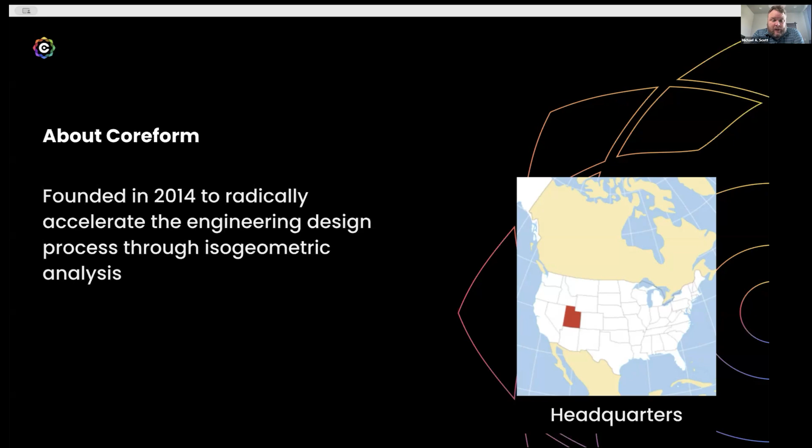So Coreform Flex is a product that we're just introducing to the market. That's one of the purposes of the webinar, to get the word out that this is now available for testing and for purchase. And it's the first solver built natively on top of this new isogeometric analysis technology. And it enables a fully automatable mesh-based workflow. And I'll show a couple of examples to illustrate the approach in a moment.

We use a generalization of the isogeometric methodology to be able to operate on the simulation models that we produce. We call that method the flex representation method. It likewise is a type of finite element method. So this isn't some novel or niche approach. We're using a standard finite element approach; if you have a deeper understanding of finite elements, it still uses the standard Galerkin approach.

And another really great thing about it is because the technology is a generalization of finite elements, it can support any capability that's also available in a more traditional finite element workflow. So it doesn't require that you discard the years of work that had been put into the development of workflows around traditional simulation packages.

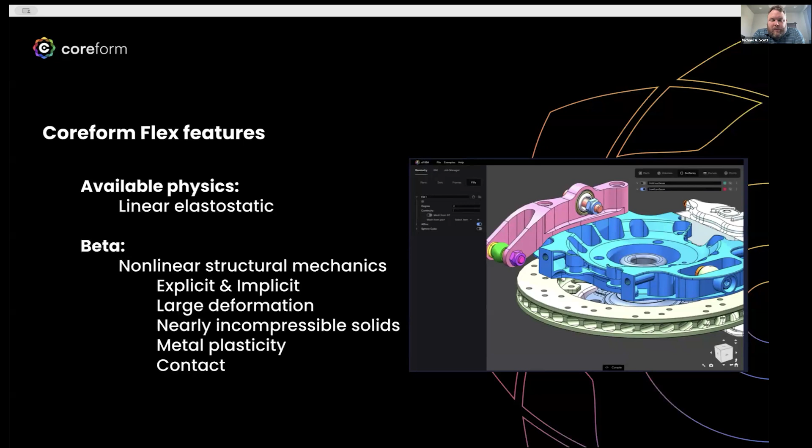Okay, so let's go ahead and talk a little bit about the traditional finite element approach to model setup, which is one of the most time-consuming parts of the process. And it's unfortunate because it really doesn't add value in the sense that it does not really provide any engineering insight, which is the point of running a simulation. It's really just an activity to try and massage CAD data into a format that's consumable by a finite element type algorithm.

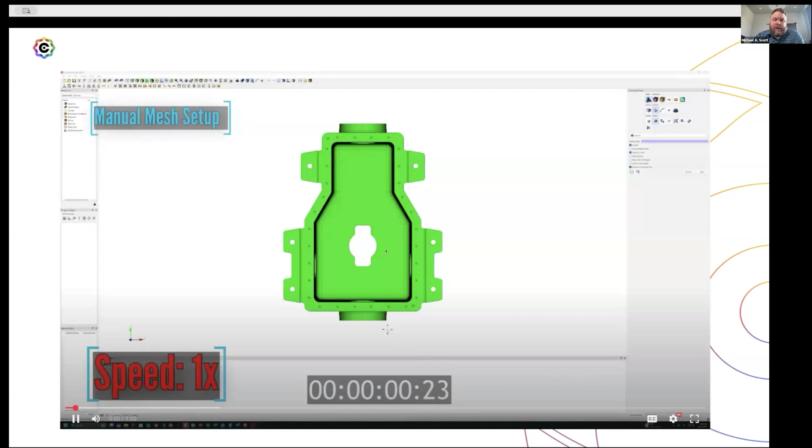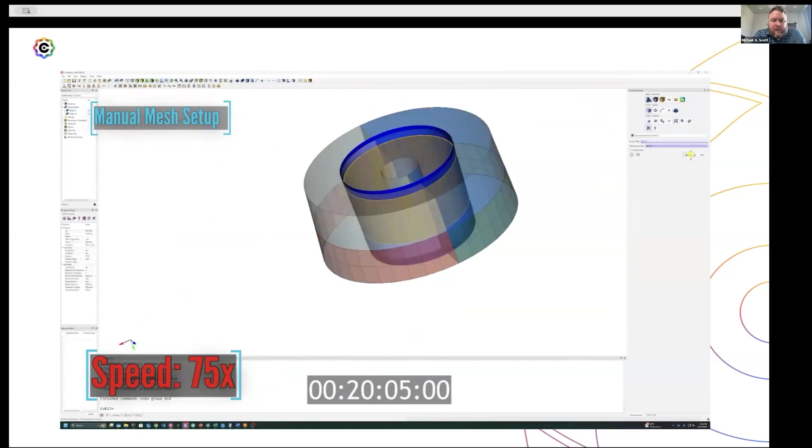And so here's an example where we use a traditional workflow to put a hex mesh onto this CAD geometry. And what we're demonstrating here is just the huge number of steps, including a number of defeaturing steps to allow us to then cut up the geometry into hex meshable subvolumes. Tet meshing, of course, is a little more automated, but it still often requires a defeaturing step and is not

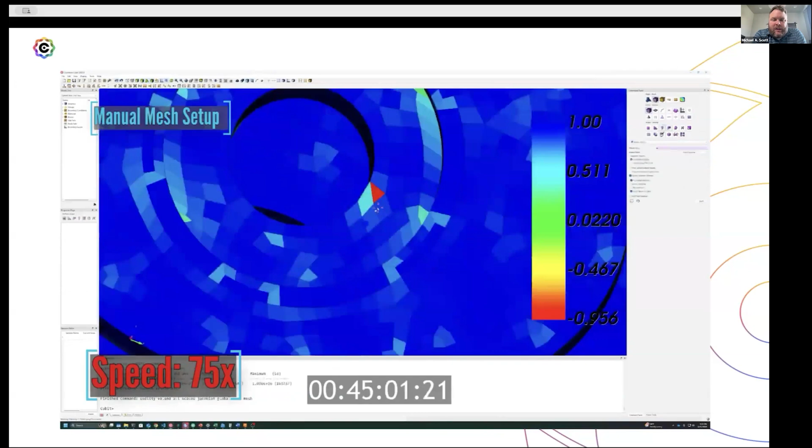completely robust. And what we're really after at Coreform is, given any CAD geometry, can we exactly generate a representation that's consumable by a solver that is an exact representation of the original CAD at any level of complexity that the user would desire.

So the intent there is just to give an overview to people that may not be as familiar with the pain that's felt when people are really trying to prep models for simulation. This isn't even about running the simulation. And then often the mesh that you produce may not be sufficient for the simulation, which then puts you in this position where you have to go back and remesh, change your approach. It just becomes very, very challenging. And it's just a waste of time and resources.

Okay, so let me show you now our approach, which is really powered by the core concepts of isogeometric analysis, which says that the CAD geometry is defined in terms of a set of basis functions that can be used in simulation. In fact, those functions are smooth and higher order, which is really powerful from a numerical analysis point of view. It is in some sense the most efficient and powerful set of functions that you could use for approximation in finite elements.

And what this allows us to do is rethink the process of bringing the CAD model directly into the solve without needing to do what I would call a traditional meshing step. And I'll show you here what we do instead. We do produce a mesh.

You know, every finite element method, regardless of how it's marketed or sold, has some type of a discretization or mesh in the background. And we likewise have a mesh, but the process of generating that re-representation of CAD, and I should say that CAD also has a mesh because it's also represented in terms of functions and geometric nodes and so on. The process of us doing that can be fully automated. Let me give you an example so visually you can see what I'm referring to here.

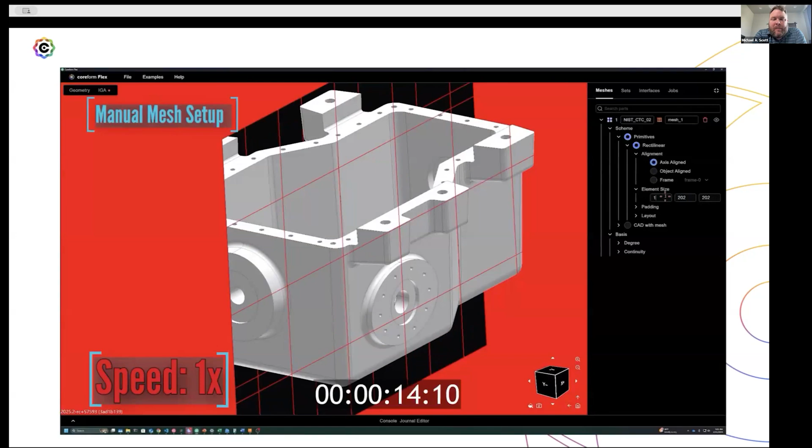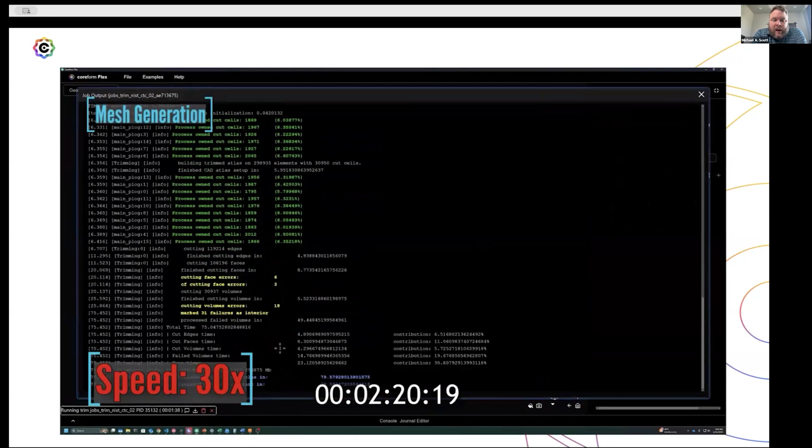So here's the same CAD model that we showed previously, but now we're going to bring it into Coreform Flex and prepare it for simulation. And you'll notice the difference right off the bat here. Okay, so we bring the model in, and the meshing process really is what you would call an immersed technique, which puts a higher order smooth spline background grid. It overlays it over the geometry and then runs an automated trimming procedure to generate a volumetric CAD object that is an exact representation of the original CAD object.

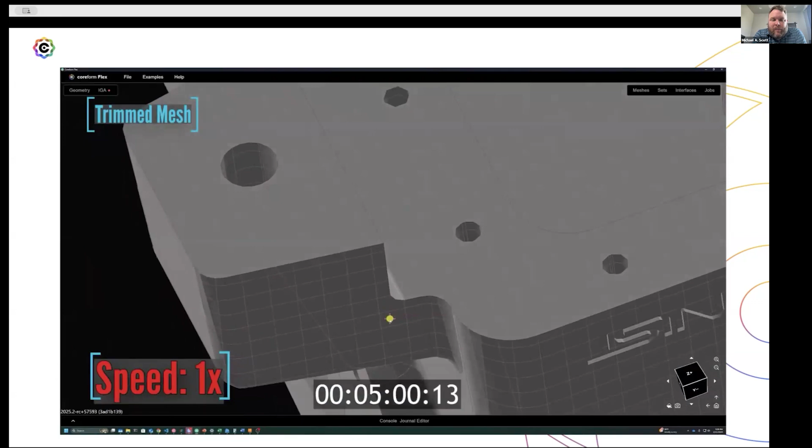And so that's the entire model prep process. We just ran it through trimming, and now we have a representation of the interior of the object as well. And the functions that will be used for simulation are the smooth higher order functions that are defined on the rectilinear background grid. So they have beautiful approximation properties that you can leverage.

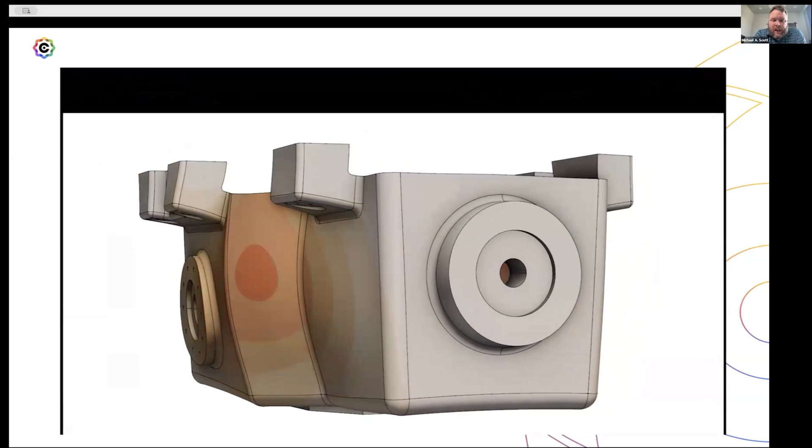And then you can run the simulation directly on the fully featured CAD. If you desire to remove features, that's fine. I mean, any CAD object that you feed into the trimming procedure will be accommodated automatically. And so here's just a very simple simulation to show that it's computable.

Here's a more complex part, just to demonstrate that we can do things that are, if you think about meshing something like this, this can be extremely challenging. I mean, if you want a hex mesh, it's essentially impossible. Even if you want to mid-surface it for shells, it's very, very challenging.

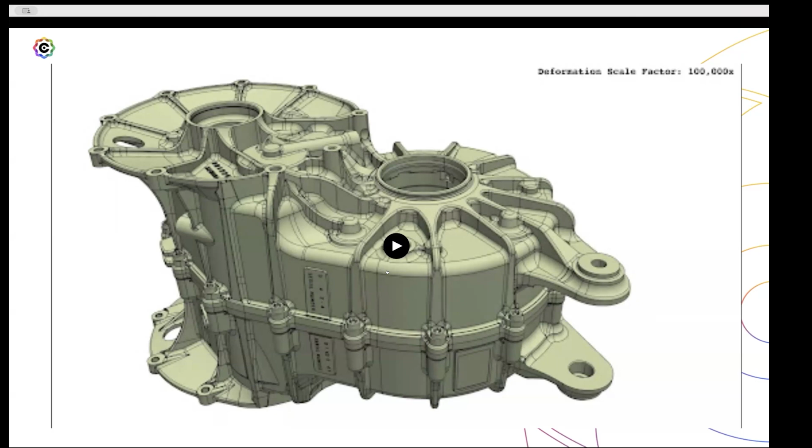And I think Greg Vernon can correct me if I'm wrong, but we weren't even able to tet mesh this object because the geometry was quote unquote dirty. So that's correct. So in fact, this model could not be meshed by any known meshing process that we have available to us. And let me show you the process with our approach.

Well, what you'll notice is there was no process, right? So we just trimmed the model, and what you're seeing on the screen is the result of trimming. It's an exact representation of the geometry, but it's a volumetric model. So it's not just a collection of bounding surfaces like the original solid CAD model. It's actually a high fidelity simulation model that you can simulate on directly.

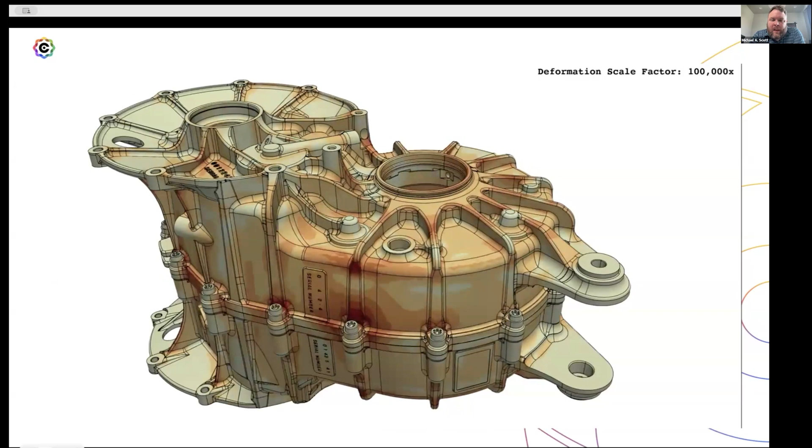And so then we just applied a load on the interior, a pressurization, just to demonstrate that the model is computable, of high quality. Likewise, this particular model is an assembly of parts. So there's the top and bottom pieces, and the screws are actually modeled with tied contact, mechanical contact. There's contact between this upper part and the lower part. So it's actually an assembly of parts that are being held together as it would be held together in its physical instantiation.

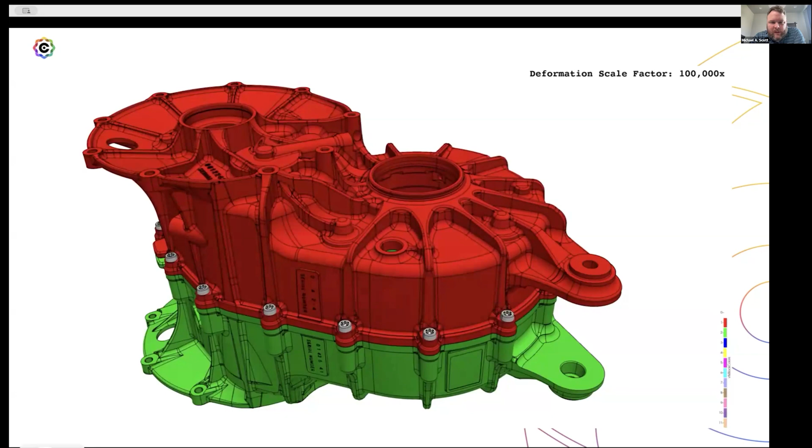All right. And just to emphasize that point, here is the same problem, but now we've highlighted the different parts of this assembly. And I always get a kick out of how even the embossings, we capture the embossings. Of course, you could get rid of them if they weren't of any engineering relevance. But it's great to have a method that can preserve as much or as little of the CAD exactness as the user wants. You're not forced into a position where you're defeaturing just for the sake of, can I get a mesh on it so that I can actually run a simulation? Our users have full flexibility and can make those decisions based on the best practices and engineering judgment that they bring to the problem.

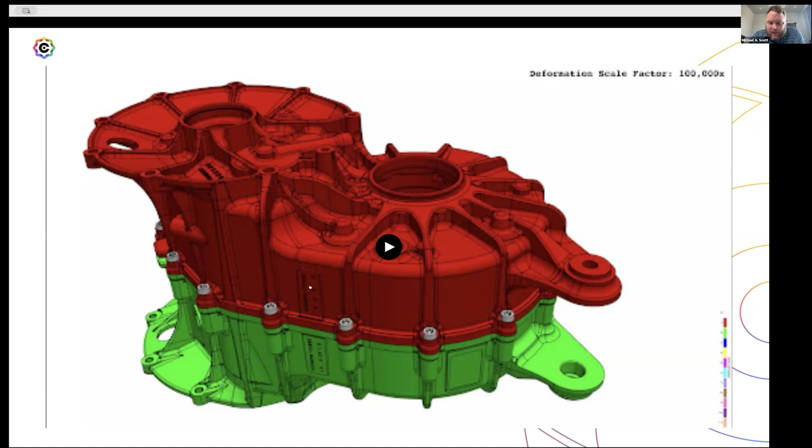Here's another example. Again, just some complexity. Here we're showing a contact problem. So this is a highly nonlinear dynamic. This is an explicit dynamic simulation with contact. And like I mentioned at the beginning, these are the features that will be released soon. And so you can see that contact is also quite robust because it operates on this nice smooth geometry, which is a big deal for contact.

If you have a background in contact, you'll know that the faceting is a challenge with contact. Especially sliding contact across faceted surfaces can produce a lot of numerical noise. And since we're operating on the exact geometry, we don't suffer from those challenges, which makes nonlinear convergence much more robust. Okay.

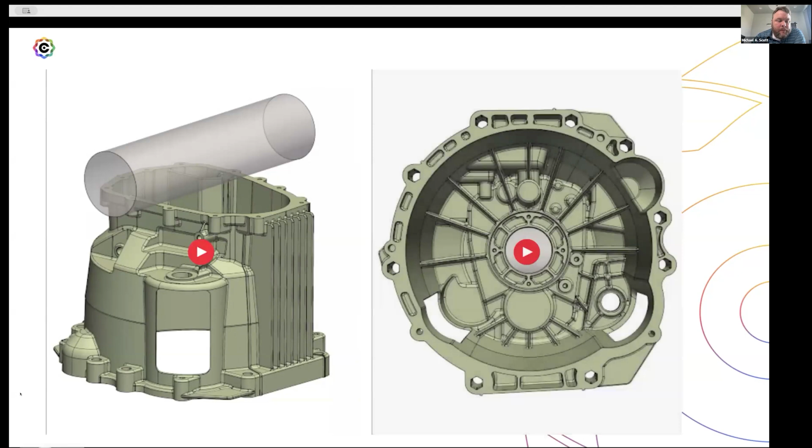So I'm going to bring to a conclusion my introductory comments about Coreform. Like I say, we will address questions after Greg does his demo. I imagine there's questions about the software and how it works. So hopefully we can answer some of those in the next section that Greg is gonna lead.

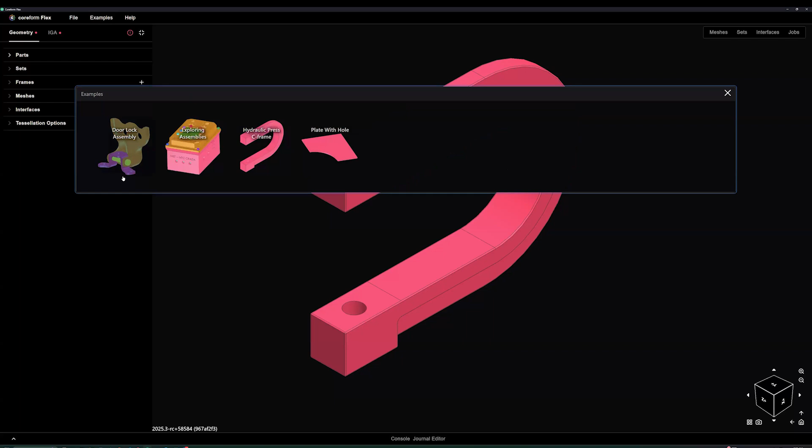And this is maybe one that some of you have seen before, but we'll show an additional example as well. What I want to point out is that for any of our early adopters who are using Coreform Flex, we have a few pre-baked examples that come with Coreform Flex, including the standard plate with a hole, as well as this C-frame example. The other example I'll share today is this door lock assembly example. And I just want to get you familiar with the overall workflow of using our tool.

You can see we have these two model trees, a geometry model tree, and then our IGA, which stands for isogeometric analysis, our IGA model tree where you specify solver settings. Note that the mesh then is defined on the CAD.

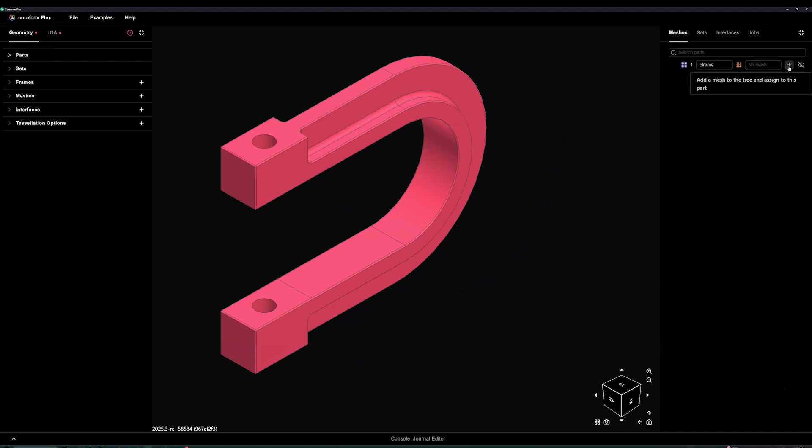And really the process to create the mesh is pretty straightforward. At the top right, we have what we call our mesh manager, which is a little kind of wizard dialog where the process of generating the mesh is as simple as choosing the part I wish to mesh and clicking the little plus button to add a mesh, which picks an automatic size based on some heuristics. Oftentimes that mesh size is a little coarser than we might wish to have.

And so we can navigate into this mesh. I want to point out that we currently have what we call primitive meshes, which include this rectilinear background grid. We're developing additional primitive schemes like a sphere mesh for parts that are mostly spherical, or annulus meshes for parts that are kind of like a torus. But you can even bring in a traditional body fit CAD mesh as well, which really highlights the fact that what we're building is truly a generalization of finite elements.

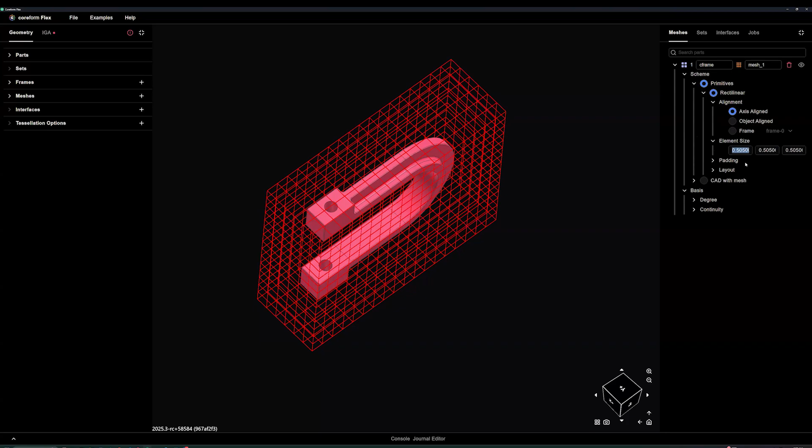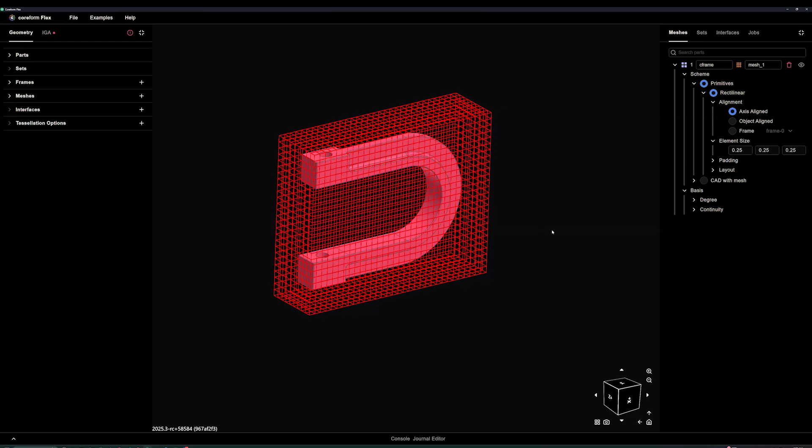And within this rectilinear primitive mesh, we can simply choose a size that we think works better for our case here. So I'm choosing a mesh size of 0.25, for instance. And maybe that's a mesh now that is fine enough for my purposes. And that's it. Meshing from a user standpoint is done. The trimming process will occur automatically when we launch a simulation. I can choose to generate the mesh independent of the simulation if I wish to preview it, but that's all I have to worry about.

As far as the rest of the simulation setup goes, the actual physics solve we call a procedure. And so we recommend that users begin by adding a procedure to their model. And you can see here we have a few different physics that we currently support. The modal analysis and heat transfer are still in beta stages. Solid mechanics is what we're talking about today.

And then as a user might go through here, maybe I want to choose a time stepping method. We'll bring up a little dialog that assists you with navigating the model tree for adding the physics you wish to add. So you can see we have a few different time steppers, including an explicit dynamic time stepper, some implicit dynamic steppers, a nonlinear static solver, and even linear solvers as well. So if we wanted to do a linear analysis, that linear analysis needs a linear equation solver. And again, I can navigate this little breadcrumb interface to choose a direct LU decomposition based solver.

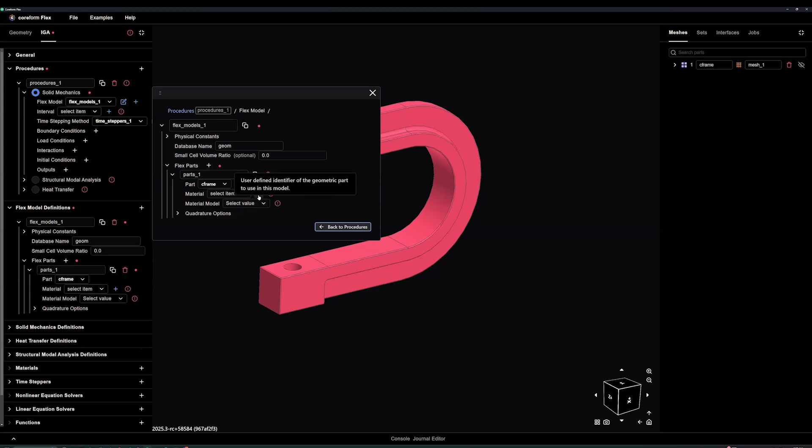And then as I finish each step, you'll notice that there have been these stop signs along the way, and the stop signs for this sub procedure have gone away. And I would essentially just navigate my way through this procedure tree, adding a time interval for my model, creating a flex model, where I would say I want this C-frame part to be active in my assembly. I want to add a material for my model, again navigating through the model tree here. I'll just put in some dummy values here just so we don't get some syntax errors.

As far as actually running the simulation, we then have a job manager as well, where we would add a job, and I would choose the amount of cores that I would want to run on, and then I would just simply submit my job. And that's really the process of the workflow now. Because meshing is gone from the workflow as a manual iterative process, it's really quick to just set up the simulation parameters and execute.

I want to also mention that all of these commands that I've been clicking through in the model tree have been issuing what we call flex commands. These are strings of commands that you could add to a journal file and automatically play. But furthermore, we support Python wrapping around any of those commands. So we ship what we call our Flex Python API.

Here in the command module, I'm just going to shebang over to a Python interface. For any of these commands, I can simply reference the Flex module and then use the CMD or command function. And I can say that I want to create a new job. So I'm just going to copy the syntax that I saw here to then create a new job. And so this allows you to even import Flex as a Python module into an external Python.

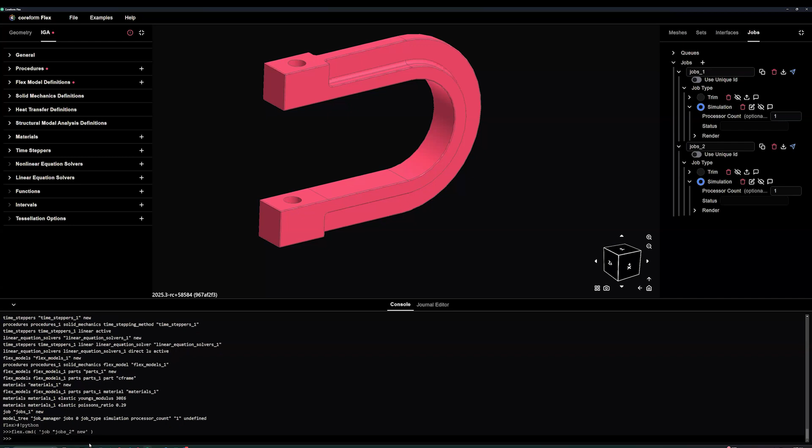So for those of you who care about scripting and automation, especially in this day and age of AI, you now have a completely robust meshing interface that can be fully automated via Python. And so Flex can operate right next to your PyTorch, for instance. This is a single part.

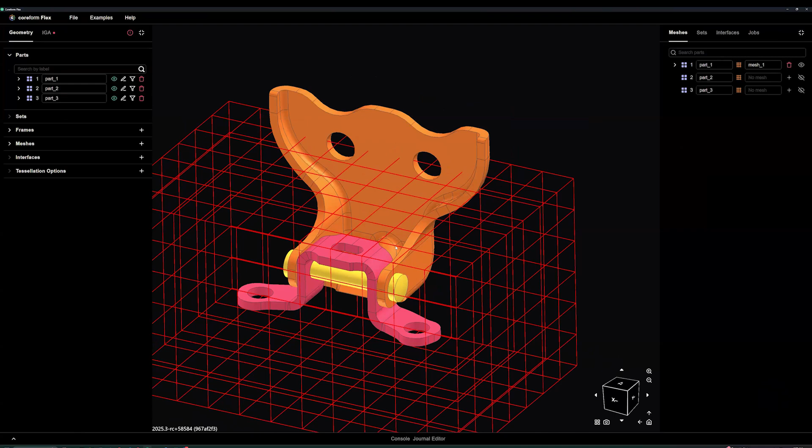And I just want to now show a more complex assembly. This other example that we provide, the door lock assembly, and we'll see that the workflow is essentially the exact same here, where the first process that I'm going to do, you can see I've got my 3 parts, is I'm just going to add meshes to each one individually. So I'll add a mesh to part 1. That is this door, or this link here. It kind of is wavy.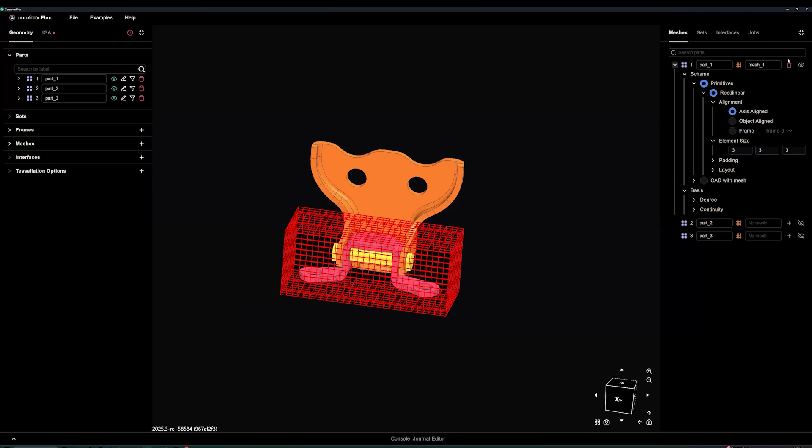And again, I'll choose a mesh size. Maybe I'll choose a mesh size of 3 by 3 by 3. Those could be non-uniform values if I wished. So I'm done meshing the link now, so I'll go ahead and hide that mesh. Now I'll add a mesh to the second part, which is this hinge on the back side. And again, I'll modify its element size to something that's more reasonable for my analysis. Okay, so now I'm done meshing that part.

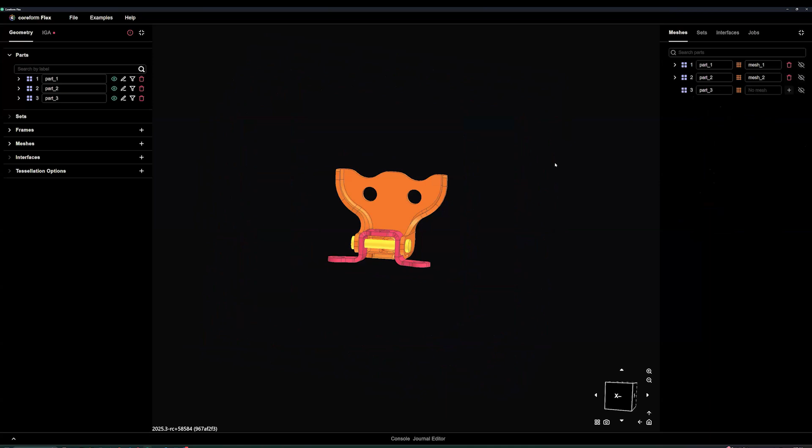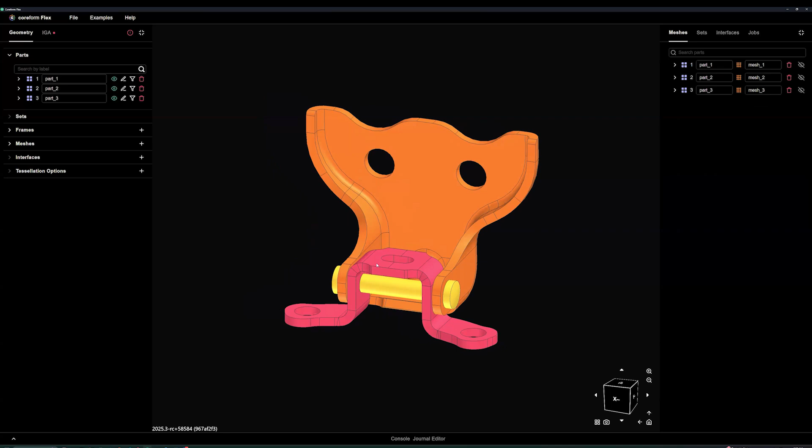And now I'll mesh the bolt. And again, choosing a mesh size, I'll just choose that same mesh size of 3 by 3 by 3. So there you have it. I am now done meshing this assembly. It didn't matter that there were 3 parts. It didn't matter that some of these parts are maybe thin structures or sheet metal, like bent sheet metal structures. The meshing process is the exact same.

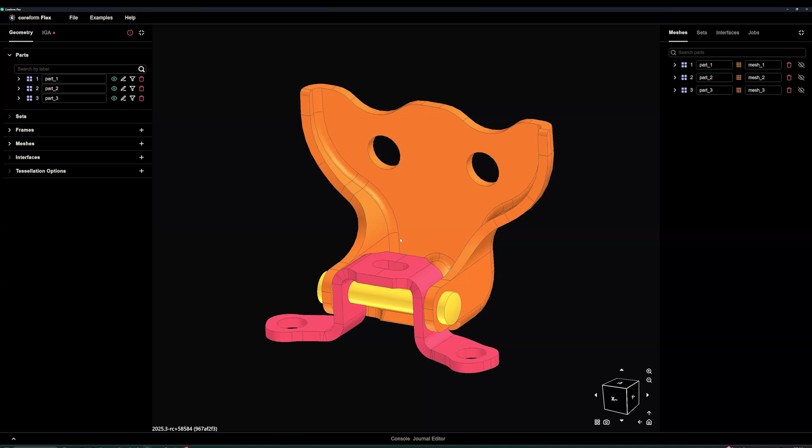Some of you may be aware that this is also an example that we have documented on our forums with a traditional meshing software called Cubit. And it's a quite involved process to build a hex mesh with traditional meshing processes. It's probably about 15 minutes for an expert user to build a mesh. For a novice user, it's maybe a couple hours to try to build a hex mesh on this assembly.

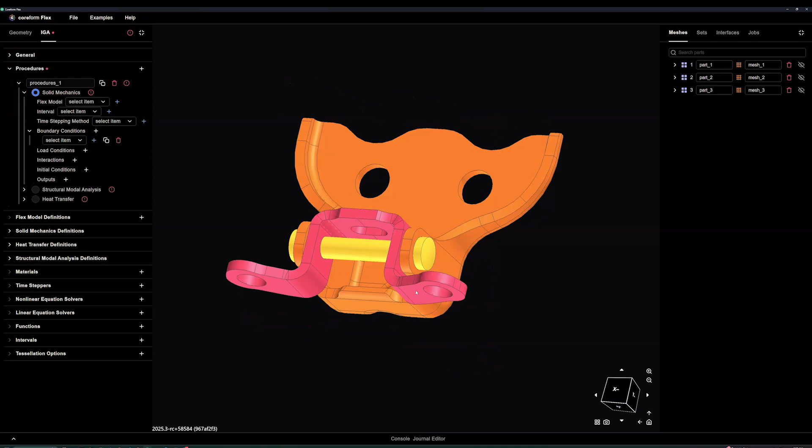And from here, I would just do the exact same process of creating a procedure, get another solid mechanics procedure. Maybe this time I'll just show assigning a couple boundary conditions. So in this case, I want to hold the bottom of this link fixed. So I'll just create a boundary condition. That's going to be a displacement boundary condition, and I'm going to completely constrain it in the X, Y, and Z directions. I want it to not move at all, so I'll choose that I want it to move by 0.

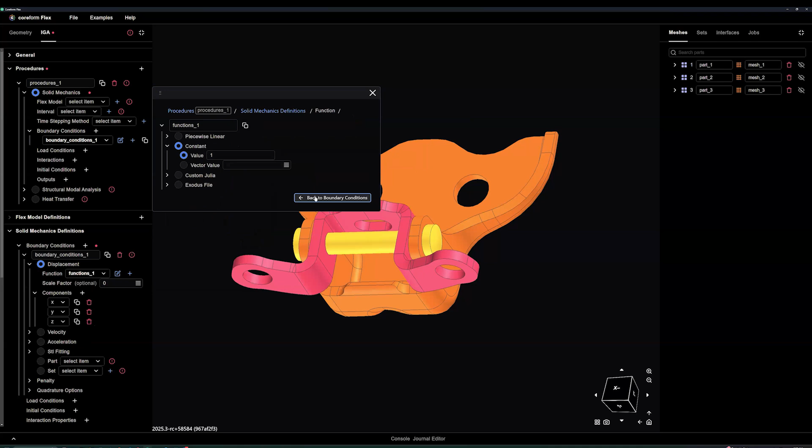I'll create a time-dependent function that is just a constant value that can be scaled by time. And so I chose 1 and then scaled it to 0. The one important thing now is I just need to create a set. So I'll just click a plus by the set that I want to apply this onto, and then use the set manager to quickly choose the surfaces that I want involved in that set. And I want to point out, I've chosen the sets after I've already built the mesh.

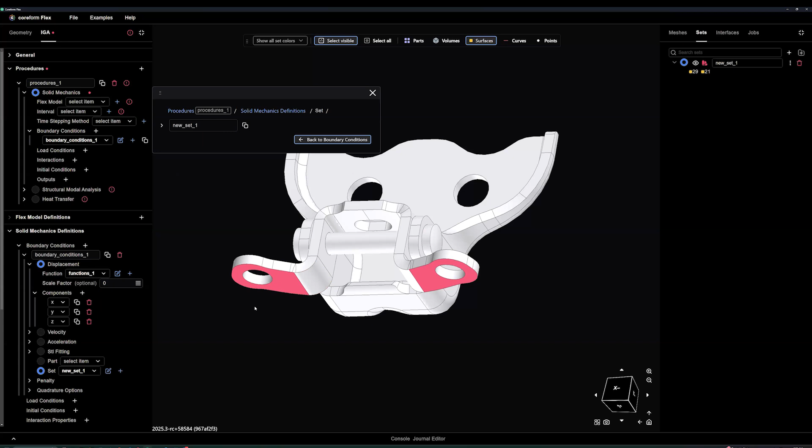And so if you're familiar with CAD-based meshing processes, if I wanted a different region for my set, maybe I needed to subdivide the surface even further to have a smaller region, you would oftentimes need to remesh and redevelop your meshing routine to build that new body fit hex mesh. But I have now completely separated the set assignment for load and boundary conditions from the meshing process. And so there's no iteration on your mesh just because you want a new set.

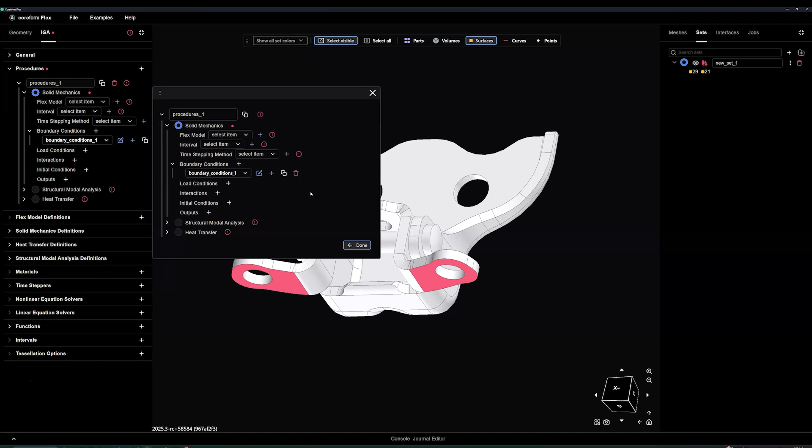And that's really it. We could go through all the rest of this process of choosing the material models to include plasticity, adding contact, a general contact algorithm, our time steppers. But that's really just a lot of parameter selection at this point, and there's no more meshing at least. And again, this is fully automated. If you look at the journal files that open up when we run this problem, you can see that it's been fully automated to make all those selections and then run this analysis.

So Greg, I think you said this, but just wanted to emphasize that boundaries and loads are applied directly to the CAD object. Yes. So we don't apply boundary conditions to node sets, for example, or element surfaces. It's all done directly on the CAD object that you've trimmed.

Then another question came in about the order of the elements. I think in this case there's C1 quadratic. Yes. And so we support currently up to quartic C3.

That's all that we've had a need to do so far. We could go higher order than that, but haven't seen a use case for it yet. Yep. Yep. That's a great point.

And as you can see here, also in the mesh manager, this is where you could specify that degree. By default, we build maximally smooth splines. So for quadratics, that would be a C1. But you could also choose a custom continuity if you wanted. So you could have P2C0 if you wished.

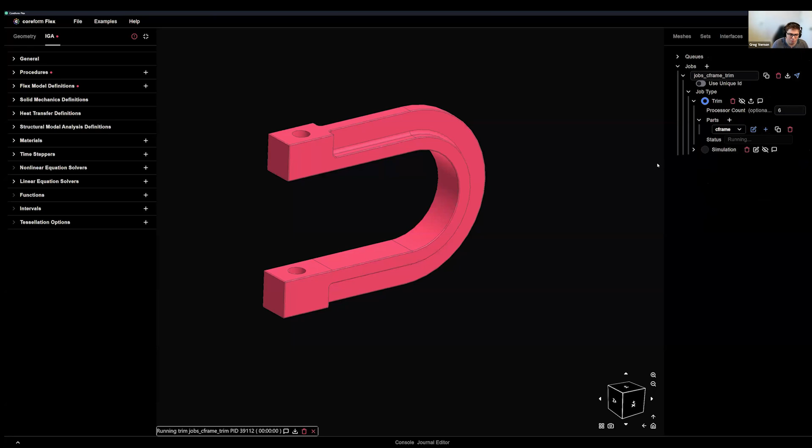Should also mention that the trimming process is a parallel process. So traditional hex meshing and tet meshing are traditionally serial or single core processes, but we've developed this algorithm to be parallelized. So I'm just going to launch this trim job. And I'm just looking at the output from this job here. So you can see it finished trimming that part in about 6.5 seconds.

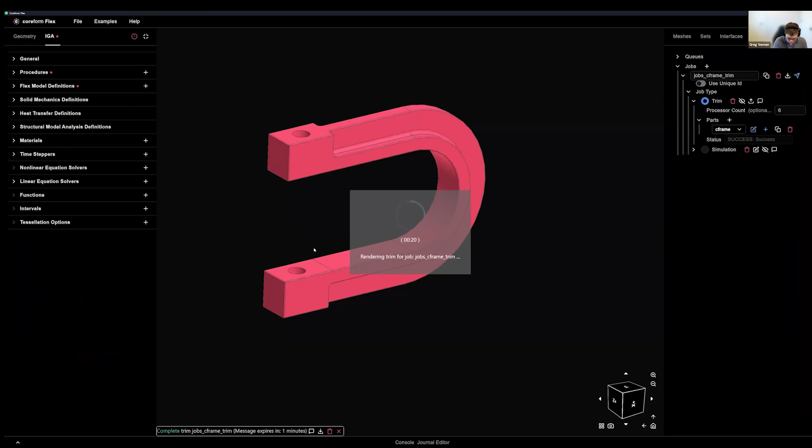And then I'm going to visualize the trim mesh. I want to point out what you're going to see is for the rendering inside of Coreform Flex, we produce just a linear faceting of the high order underlying geometry. So it's going to look a little faceted, almost like an STL file. But just know that the actual representation is the CAD. So I'm going to hide the actual CAD body now.

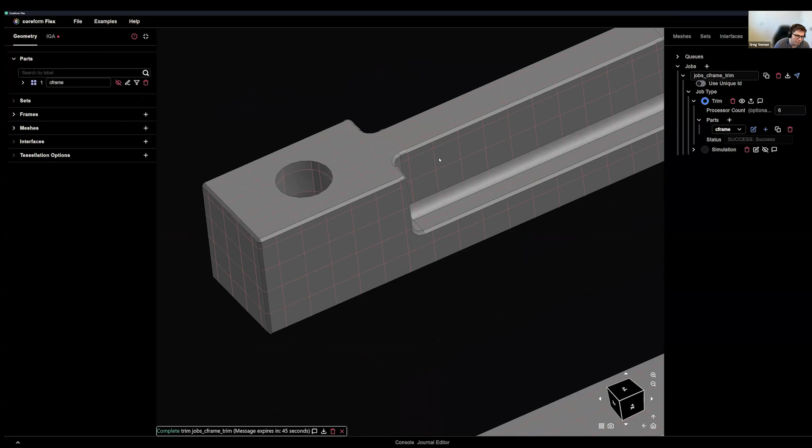So then what you can see here are the black lines are the CAD entities. So we're able to understand where the original CAD features are in this trimmed mesh. And then these red lines or pink lines are the boundaries of those trimmed elements. And so that's what the trimmed mesh looks like in this case. Okay.

Thanks, Greg. Another question comes in, any dependencies of Flex on Cubit? I can answer that one. So you can prepare Flex models in Cubit and export them to a file that can then be read into Flex, but we don't embed Cubit inside of Flex. I believe that's the question.

Yeah. And to add to that as well, the inspiration for the Flex Python API came from Cubit. And so Cubit has a very powerful Python API, and it can also be imported into an existing Python session. And so we oftentimes do that in our consulting work here at Coreform, that we use Coreform Cubit and Coreform Flex in fully automated Python scripts to run our analyses.

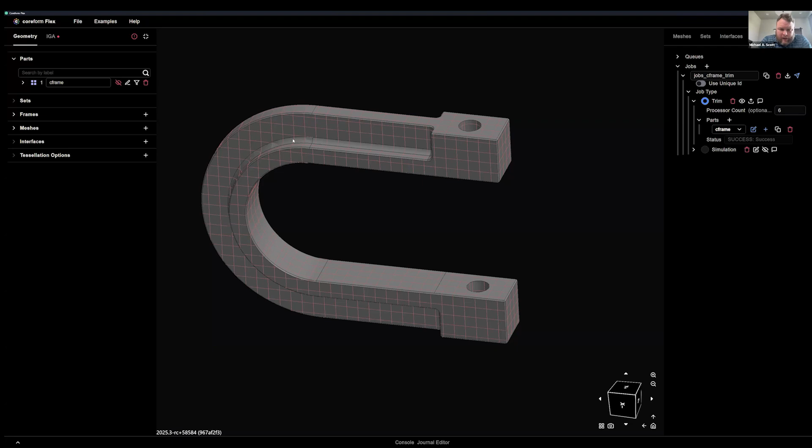Okay, thanks, Greg. A few more for you, I think, here. Can we assign a custom relation between stress and strain? Also, can we assign different materials for the different parts of our model? Yeah, we can definitely assign different materials. We do have a limited set of materials today. You can see here our material models that we include.

We have a traditional linear Hookean elasticity model that we don't really recommend users use, but it's there for being able to verify to traditional finite element codes that have those elasticity models. We also have large deformation elasticity, a Mooney-Rivlin material. Both the Neo-Hookean and Mooney-Rivlin support near incompressible elasticity formulations.

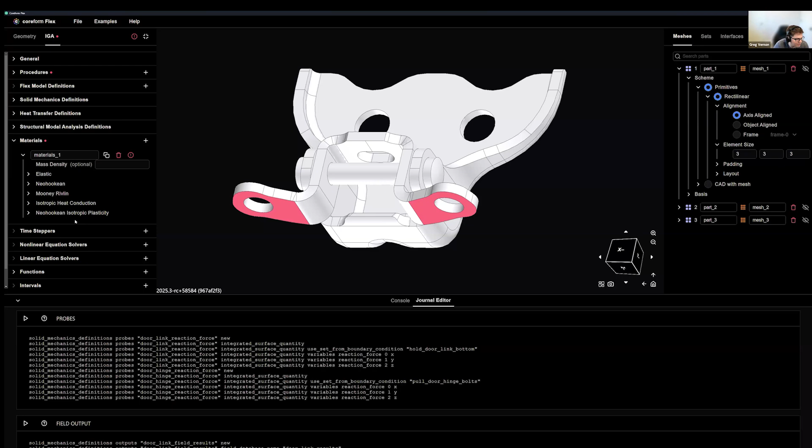You can see we have an isotropic heat conduction model as well as a Neo-Hookean elasticity with isotropic plasticity on it. Again, we're looking for feedback from our users for additional material models to add, but you can assign unique materials and material models to individual parts of your assembly.

As far as the unique relationship between stress and strain, our plan is to use Julia as our user subroutines, not just for assigning custom boundary and load conditions, but also for defining user materials. However, the user material interface is not yet available in Coreform Flex to external users.

And so maybe I'll just at least show where you would access a Julia subroutine. You can see here that there's just another option here from piecewise linear constant. I can choose custom Julia, and then I can point it to the Julia file and a function within that file that's the main calling function, and then choose a return type. So again, as our needs for the Julia subroutines grow, then we'll expand the capabilities of this utility.

And I think one of the things that's valuable about this is that if you're familiar with Julia, it is just-in-time compiled. So it's as easy to run in a solve as something like MATLAB or Python. There's no compile step that you have to worry about. So you don't have to worry about making sure you have the compilers on a Windows machine and on a Linux HPC system. Julia will handle all that for you.

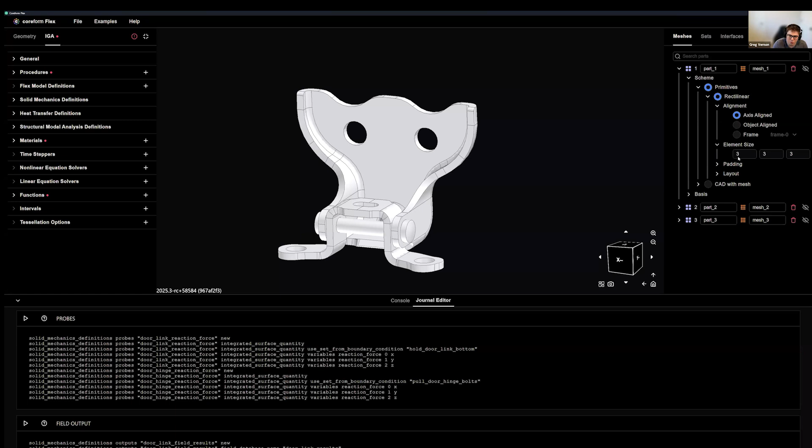A comment on the large element size as well is, Mike, here I've used like a large element size kind of in a uniform size on each individual entity. Splines support local adaptivity in them. That's not something that we have today, but we are working on some local adaptivity capabilities. Yeah, that's right. And I answered that in another written answer.

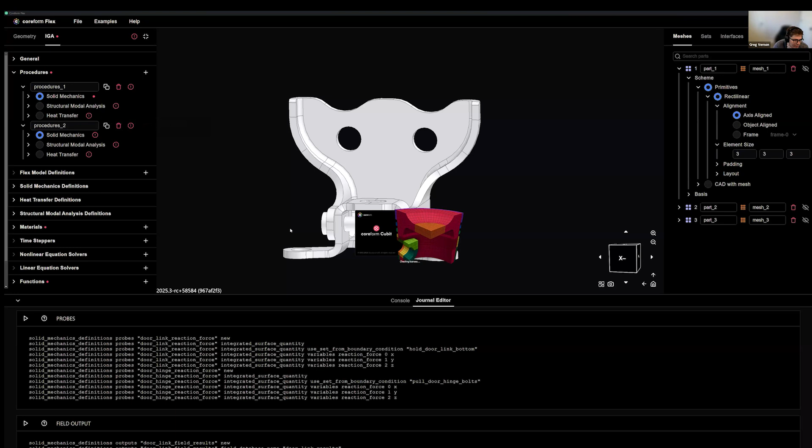Okay, let me just answer this one. This is actually about Cubit, not Flex. Can one import, I believe they meant export, the mesh from Cubit to ANSYS Fluent ready to go? If the question is the Flex model, again, we don't support, yeah, I don't know. I don't know what exactly the user or the guest was intending here.

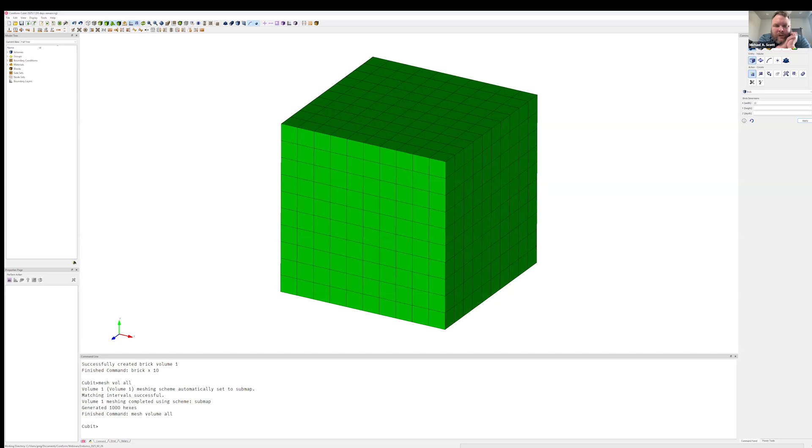Yep. The way that it reads is, can one import the mesh from Cubit to ANSYS Fluent? So if we're talking about Cubit proper as a traditional FEA tool, yep, processor tool, the answer is yes. If you're talking about Flex, the answer is no. Correct. As you can see here, we have these export types. It's like the ANSYS CDB, CGNS, Fluent meshes, OpenFOAM meshes. So a lot of choices.

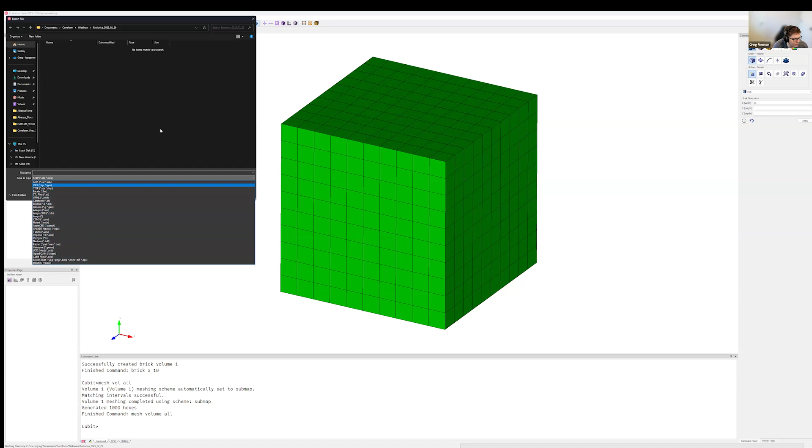How do we choose the initial mesh size? Let's say we have square 1000 by 100 by 100 and a hole of radius 1. How to choose the mesh size? Well, currently we have two approaches. We have an approach where you can have one background grid per part, and then you can refine that down to capture the geometric features you're interested in.

The other approach we have is what we would call a mesh cutting procedure, which essentially allows for a discontinuity in the background grid basis functions local to the hole, so that it behaves as it should, like there's actually a hole in the mesh. And then a third approach that's under development is just local adaptivity, where you'll be able to put more mesh right at where the hole is. That's probably going to be the preferred approach long term, but we haven't yet released that capability.

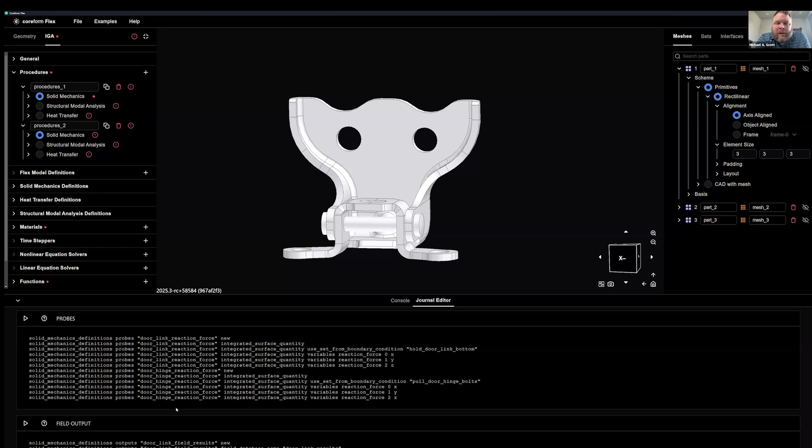Could you explain something about contact modeling technology of Coreform Flex comparing with the contact constraint approach? Okay, so I would say that we're building on what would be considered the state of the art in both mechanical contact literature or research in the finite element community, but we also are bringing in a lot of technology from computer graphics, gaming in particular, in terms of the geometry processing to increase robustness.

So I would say that while contact shares some similarities in terms of the response that you'll see in the actual bodies being modeled, it's quite a bit more modern than what you would find in traditional FEA. And I'm happy to explain that further offline. But that's about the best I can do, I think, right now. Okay.

Isogeometric methods historically had some limitations when dealing with very large models, as IGA can become memory intensive. Is any of that relevant now? I think that, like I say, per degree of freedom, it's more expensive both in compute and memory. We have fully distributed capabilities and have spent many years on this issue. And what I would say now is that we're not memory constrained, and we can scale to tens of millions of degrees of freedom without issue.

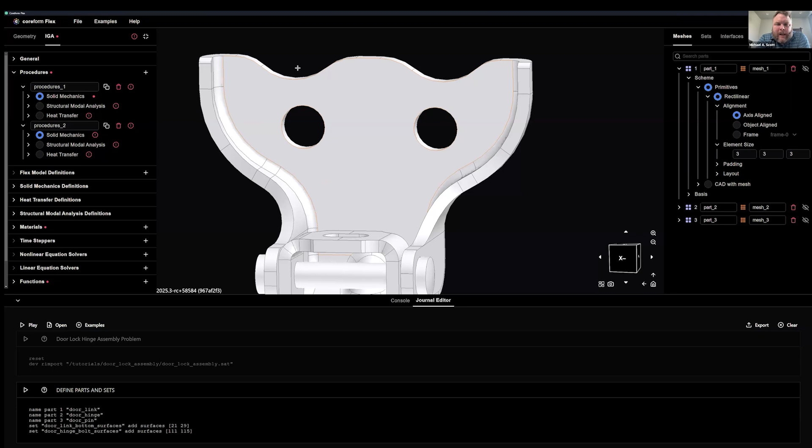Is there an integration with MOOSE planned? Good question. We do work with the MOOSE team closely. We already have some integration capability. In fact, you can export directly to a format that MOOSE can now read in and perform isogeometric analysis in MOOSE. So I guess the answer to that is yes, we already have that. I can't speak to whether it's released in MOOSE yet, but certainly we have people using it. Greg, do you know?

Yeah, so we have capabilities released in MOOSE. It is still being actively worked on. What I'll also say is that I have a fork of MOOSE where I am updating the current IGA model, one of the examples in the solid mechanics module, that does the C-frame problem. I'm currently working on that in my fork, and we hope to have a merge request up soon that demonstrates that capability.